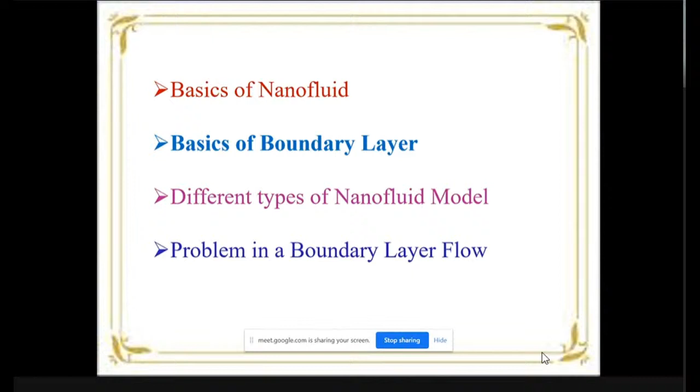So before going to our talk, we want to know how fluid dynamics is used in our life. That is very, very essential. Before starting fluid dynamics, I will recollect some ideas behind that. Mechanics, all of you know, is the oldest physical science that deals with both stationary and moving bodies under the influence of force. In that mechanics, statics is there. It is a science which deals with the body at rest, called statics.

Next, if you come to dynamics, it is a science which deals with bodies in motion. It's called dynamics. Now coming to fluid mechanics: fluid mechanics is a science which deals with the behavior of the fluid at rest or in motion. So that is called fluid mechanics.

So without fluid, we can't live in this world. There's no doubt at all, because in and around, we are surrounded by fluids only. We are breathing air, so that is also a fluid. So in that way, we can say fluid dynamics plays a vital role in your day-to-day life.

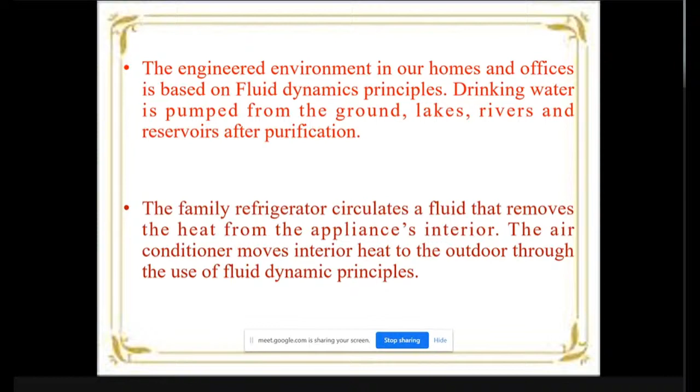Before going to nanofluids, we want to know what is meant by a fluid. Before going to fluids, we want to know the states of matter. Matter is made up of molecules. All of you know that gas, liquids and solids are the three states of matter. Of these three states, gas and liquid we call fluids. Why? Because the definition of a fluid is a substance which is capable of flow.

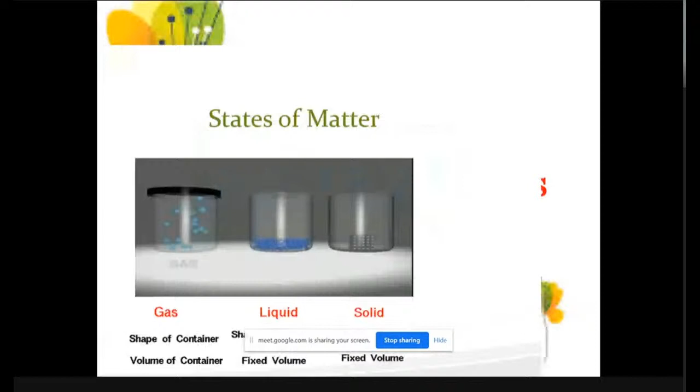Based on their properties, fluids can be classified as compressible or incompressible, Newtonian or non-Newtonian. But nowadays, in the recent scenario, nanofluids play a vital role both in engineering and in our day-to-day life compared to ordinary fluids. So today my topic is going to be mainly on nanofluids.

So what is meant by a nanofluid? I already told you that air and liquids are natural fluids. But a nanofluid is not a natural fluid; it is an artificial fluid. It was first introduced by Choi in 1995 in his laboratory. It is a new class of fluid containing nanoparticles of size 1 to 100 nanometers. That we call a nanofluid.

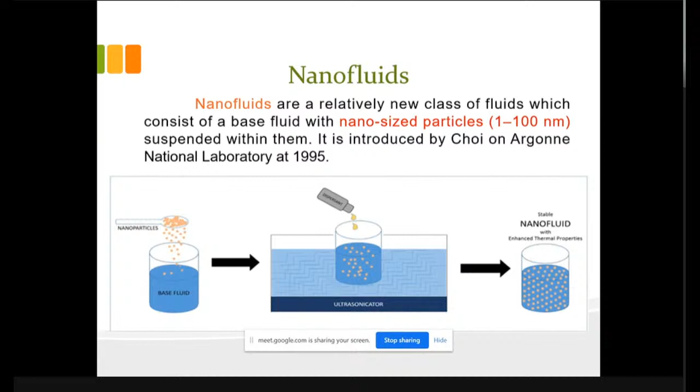To think about a nanofluid, first you take some liquid in your glass. You add some nanoparticles, then it will become a nanofluid. So this is the basics of nanofluids: to the base fluid we add some nanoparticles, and if you mix them, it becomes a nanofluid. It has lots and lots of advantages. We will see them later.

So, the measure of nano in our life. An atom is 0.1 nanometer. These are some examples I am giving. DNA is 2.5 nanometers. Our hair is 1 lakh nanometers, an ant is about 5 million nanometers, a tennis ball is 100 million nanometers. These are some examples of nano measures in our life. So a nanoparticle is a very, very tiny one.

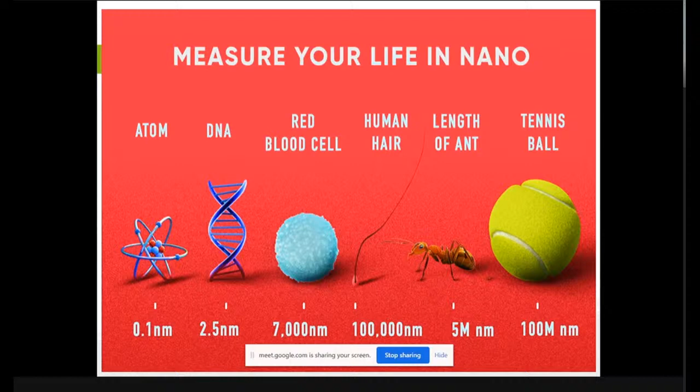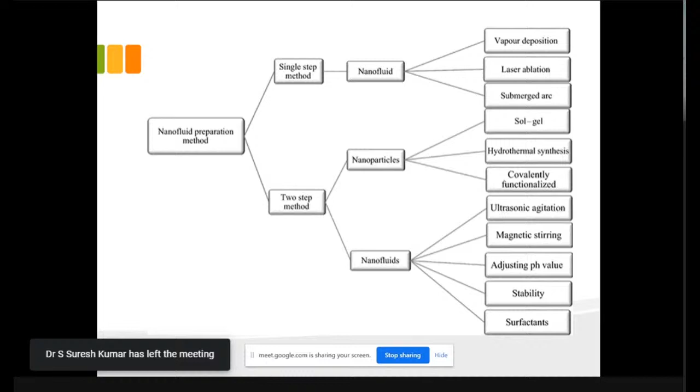If you want to do research in nanofluids, physicists and chemists do the research experimentally, but as mathematicians we are doing it analytically. There are two methods for preparing a nanofluid. The first one is the single-step method, and the second one is the two-step method. In the single-step method, we get the nanofluid within a single step. In the two-step method, first we segregate the nanoparticles, then we take the base fluid, mix them together, and it forms.

Suppose we want to do research in nanofluids experimentally; the experimental part will be very high in cost. For example, if you want to study the uses of gold nanoparticles, nowadays you know the rate of gold is very, very high, so doing experiments is very costly. But if you solve it theoretically using mathematical models, without any cost we will get some basic idea about our research.

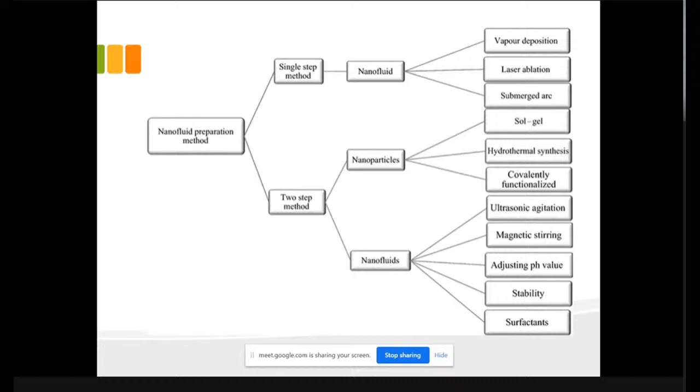Now I am going to tell about the one-step method. What is meant by the one-step method? Producing the nanoparticles and dispersing them in the base fluid in a single step is called the one-step method. You just take the base fluid, put in some molecules, stir well, and you will get the nanofluid. This is the simplest way of making nanofluids.

This is the best for synthesizing metallic nanofluids only. So in the one-step method, it is best for metallic nanofluids.

In the two-step method, in the first step nanoparticles are synthesized separately, and in the second step we dissolve or disperse them into some liquid medium, the base fluid, making a dispersion. So that is called the two-step method.

So this is the experimental approach. Those who want to do experimental work, these are the two methods available. But mainly we will concentrate our research only on the analytical side. There are advantages and disadvantages in both methods when doing experimental work.

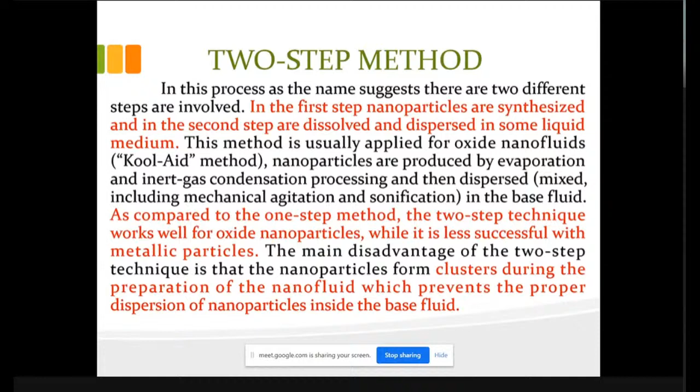So now what is the purpose of preparing the nanofluid? Instead of using the plain fluid, what is the purpose of using the nanofluid? That we want to think about. So already, the nanofluid is nothing but a combination of base fluid plus some nanoparticles.

If only the base fluid is there, suppose you are doing heat transfer, it will take much time. If you want the heat transfer to be high, the thermal conductivity of that liquid needs to be enhanced or increased. Only then will the heat transfer occur faster. So in this aspect, the nanofluid will enhance the thermal conductivity of the fluid. Now I will tell you how.

If you take engine oil, it has a thermal conductivity of 0.15. For example, if you are using engine oil in your car or two-wheeler, it needs to reduce the heat from the piston. The engine oil will absorb that heat, and it wants to reduce that heat, but ordinary engine oil will take much time to do so.

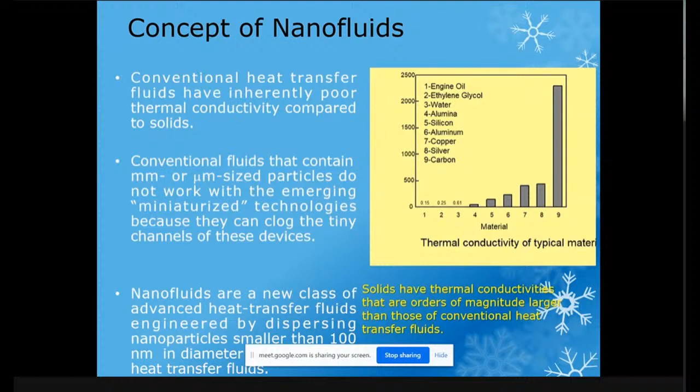So what are the factors that enhance the thermal conductivity of the nanofluid? Already we know that nanofluid is base fluid plus some nanoparticles. So the nanoparticles play a vital role. But we can't add more and more, that's not all there is to it.

So what are the factors that enhance the thermal conductivity of the nanofluid? The first factor is nanoparticle volume fraction, which we will denote as phi. What is nanoparticle volume fraction? It is nothing but the amount of nanoparticles we are adding in the base fluid.

If you add more and more, what will happen? It won't dissolve, and there will be sedimentation falling to the bottom layer. For example, if you are preparing tea or coffee and you add sugar and stir well, it will dissolve. But if you add more and more sugar, after a few attempts, it won't dissolve anymore.

That sugar volume acts as a barrier for heat transfer flow. That's why the volume fraction phi is very important for preparing nanoparticles. It will enhance heat transfer if it is minimized. The second thing is nanoparticle material.

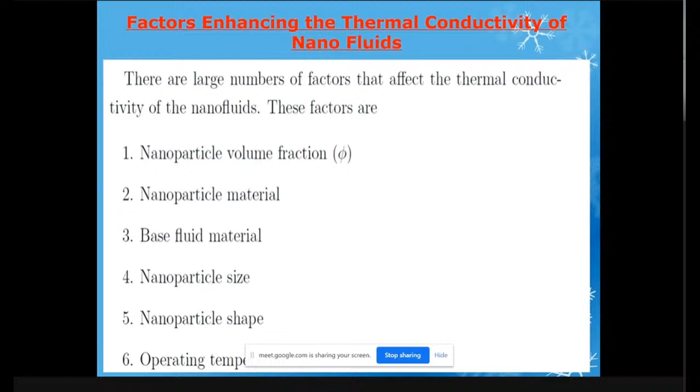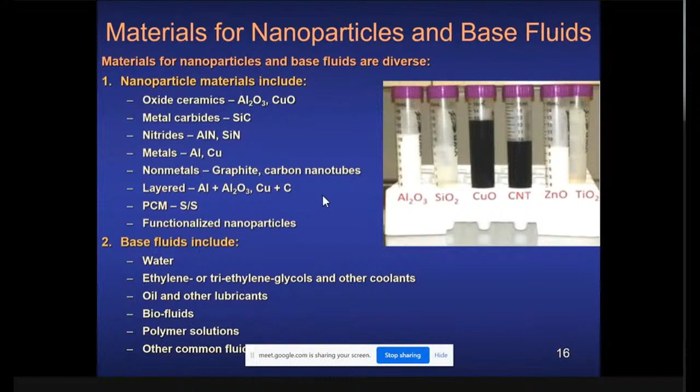Now I am going to show some examples of nanoparticles. Oxides are there, metals are there. Oxides means Al2O3, CuO, and so on. Then metals, and PCMs are there. Coming to base fluid, we have water, ethylene glycol, oil or other lubricants, biofluids. These are some examples of base fluids and nanoparticles.

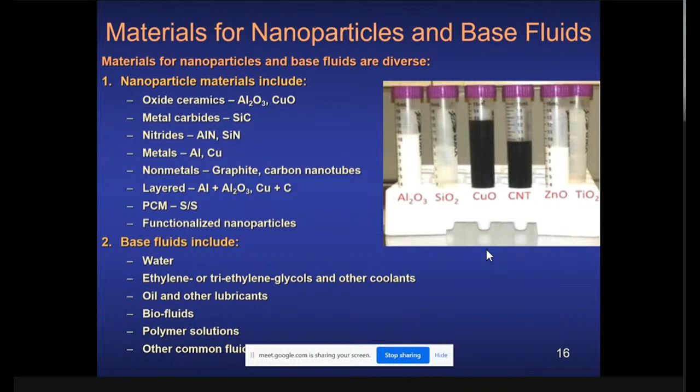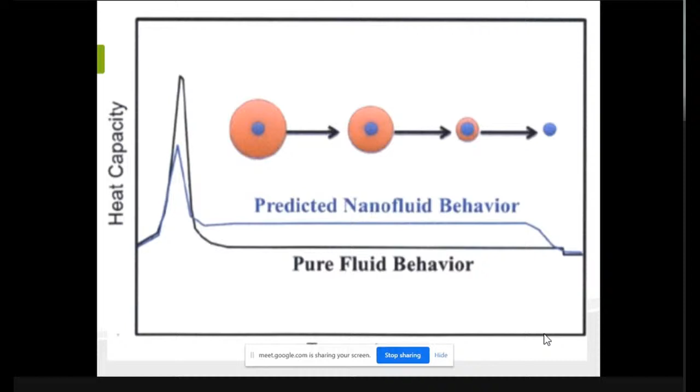Now I'm going to tell some applications of nanofluids. In transportation problems, we use these applications for industrial cooling. Cooling purpose is very important - cooling applications include nuclear system cooling. Space and defense also use nanoparticles, cooling of microchips, and medical applications. These are some applications of nanofluids in our life.

You can see here - all of you know that heat transfer in solids is by conduction. Heat transfer in liquids involves both conduction and convection, though mostly convection. So nanofluid is nothing but liquid plus solid - conduction plus convection gives an advanced heat transfer rate. So nanofluid means it will give an advanced heat transfer rate.

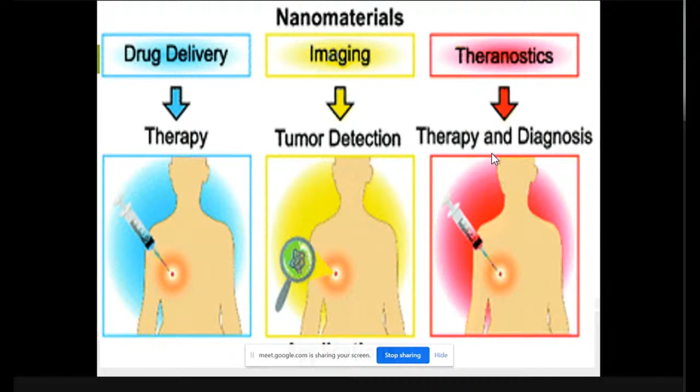So now I told that nanofluid plays a vital role in medical applications nowadays. This is drug delivery. Nanomaterials are used in drug delivery therapy also. So how, I am going to explain here.

For example, if you have some cancer in your hand, in those days what would they do? Some cancer in your lungs or anything, you would want to do an operation, open heart surgery, or just operate and take that cancer cell outside. The cancer cell is nothing but unwanted cells formed in our body.

If you use the nanoparticle, how the medicines are used is: for example, if in our hand that cancer cell is there, in that particular area, we can inject those nanoparticles. It will go and deposit on the cancer cell. If you give some external force or external magnetic force, it will dissolve, and automatically the cancer cell will be destroyed. Just let me explain this with a video.

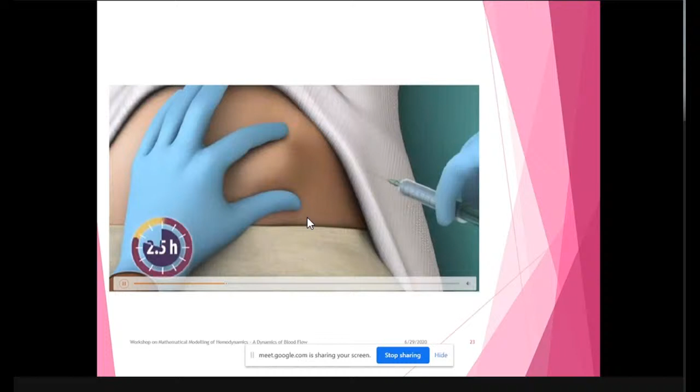So you can see here our human body. The black areas are some cancer cells. This is our nanoparticle. So just you can inject it, and when you give that nanoparticle, it will go and coat on those cancer cells. Here in the stomach, the cancer is there. Just we are injecting the nanoparticles. So what will happen is the particles go inside our body and deposit on the cancer cell itself. So this is how it is depositing there.

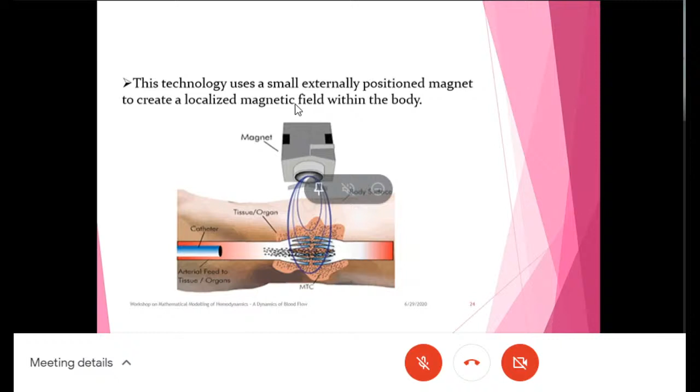So if you give some external force, automatically the cancer cell will be destroyed. You can see this here: in my hand, the cancer cell is there. I'm giving magnetic nanoparticles in that area. If you apply an external magnetic field on our hand, or wherever on the body surface, and then if you remove that magnetic force suddenly, the magnetic particles which are in the cancer cell will dissolve our cancer cell. So nowadays, without any operation, we can take treatment for cancer cells using our nanoparticles. This is one of the applications of nanoparticles in medicine.

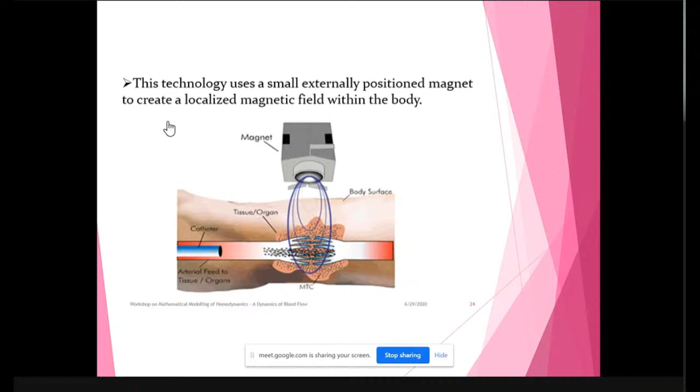So I already told that we are going to deal only with theoretical aspects. We are not going for experimental research. When we want to study theoretically, we need to know the physical properties of the nanofluid.

The first one is the thermal conductivity of the nanofluid. It depends on the particle volume fraction and the thermal conductivity of the base fluid and the solid nanoparticles. So we are having two types of models on the thermal conductivity. The first one is the Maxwell model of thermal conductivity, given in the equation Knf equal to. It was first proposed in 1873. So this is one type of thermal conductivity of

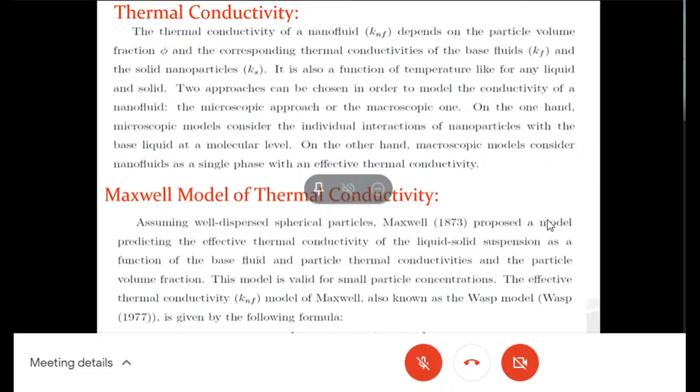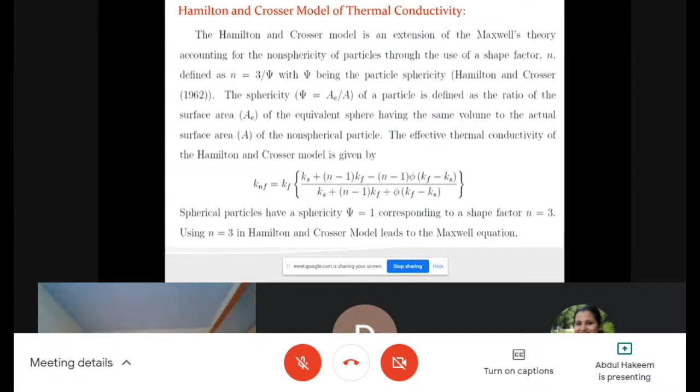nanofluids. The second one is the Hamilton-Crosser model of thermal conductivity. This is given in this equation. In this model, they define n, the shape factor n. n is nothing but 3 by psi. Psi is nothing but the ratio of the surface area of the equivalent sphere having the same volume to the actual surface area of the nanoparticle.

Hello? So you can continue, sir. Yes, okay, sir. Yes, sir. Please continue. Okay.

If water will flow a long distance when comparing with the oil, it is because of the viscosity. So like that, in the dynamic viscosity we are having two models. The first model was done by Einstein. If the volume fraction is less than 1, we can use that Einstein model. Next one is the Brinkman model. It was introduced in 1952. Normally, in our research, we are using the Brinkman model only for viscosity.

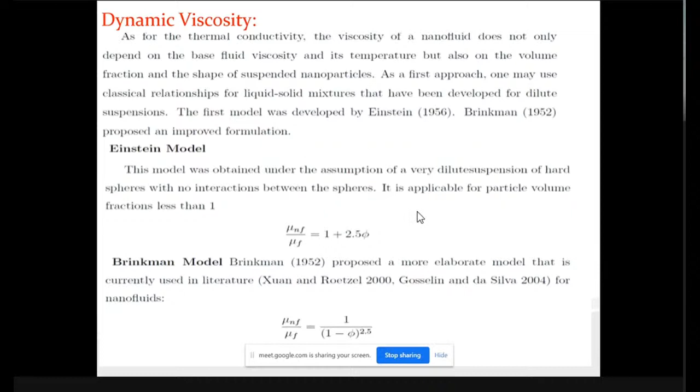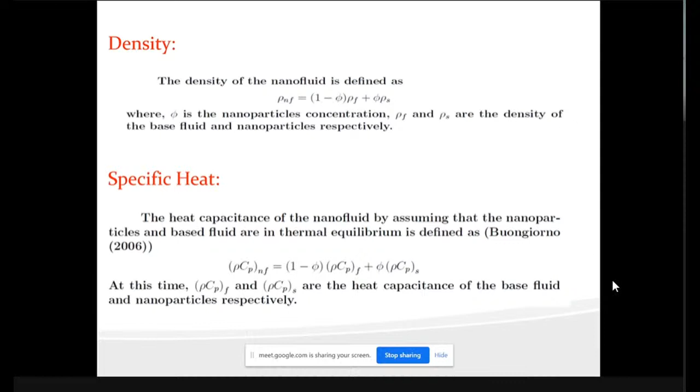If we take the specific heat capacity, Buongiorno in 2006 introduced that rho Cp of nf is equal to (1 minus phi) rho Cp of fluid plus phi rho Cp of solid. So these are the specific heat capacity. So if you want to do research, you want to know some physical properties. The main ones are thermal conductivity, viscosity, density, and specific heat capacity of the nanofluids.

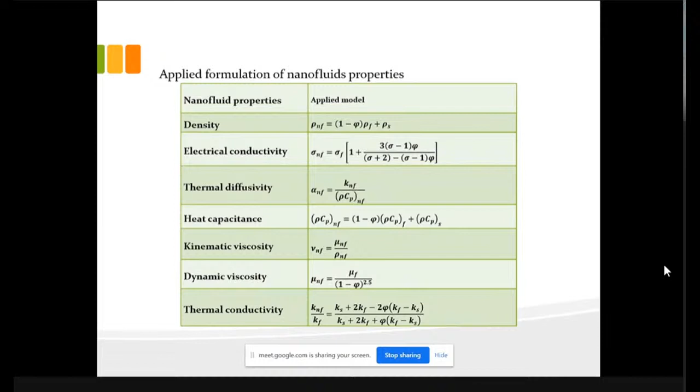So this table shows some applied formulations of nanofluid properties. Density is given, electric conductivity, thermal diffusivity, heat capacity, kinematic viscosity, dynamic viscosity. So these are some examples of properties of nanofluids.

So now we have a doubt. Sir, we said that a nanofluid is nothing but a base fluid where we are adding one type of nanoparticle. So is it possible to add two or more nanoparticles? Yes, it is possible. In the current scenario, research is going on in that area. We call it a hybrid nanofluid. A hybrid nanofluid is nothing but adding more than one type of nanoparticle in the base fluid.

For example, in our day-to-day life, if you had something spicy, for example biryani, what will we do? If you want to digest quickly, we will take lemon juice with sugar. Somebody will like salt, so in that lemon juice we will add some salt. If you want to digest very quickly, you want to have lemon juice with salt and sugar.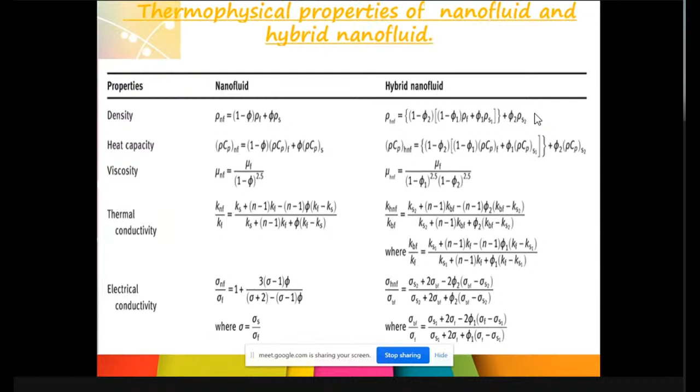Likewise, we can define the heat capacity, viscosity, thermal conductivity, and electrical conductivity of the hybrid nanofluids also. So those who want to do research in nanofluids, first you need to know these properties, which property we are going to use. In this slide, you can see that the viscosity is nothing but the Brinkman model. Many models are also there. That depends on our problem. So I gave some basic idea about nanofluids. Now we will come to the boundary layer.

So what is meant by boundary layer? If you ask me, I will give the definition. The boundary layer is nothing but the locus of points at which the velocity of the fluid particle is 99% of its free stream velocity. This is the definition of boundary layer. The boundary layer concept was first introduced by Prandtl in 1904 at the International Congress of Mathematicians held in Germany. He did that experimentally, and he gave some layers also: laminar boundary layer, transition region, and turbulent boundary layer, using the values of the Reynolds number.

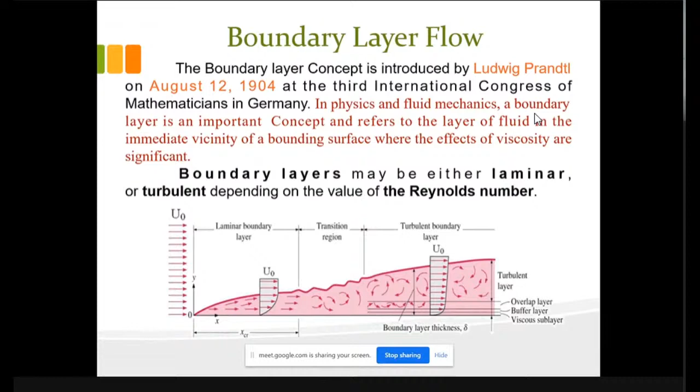If the Reynolds number is above 5 into 10 to the 5, we say that is the turbulent boundary layer. Below that is a laminar boundary layer. That is called the critical Reynolds number. So now I'm going to explain what is meant by boundary layer flow. For example, you have a flat plate. The solid is stationary. The fluid is moving parallel to the solid, above the solid. The surface where the fluid and the solid are touching together, in that region, is the boundary of the fluid. I will explain later.

In that boundary layer problem, the first case: the solid is stationary, the fluid is moving. That was done by Prandtl experimentally. Another case is also there, for example, the solid is moving and the fluid is stationary. An example of that second case is the moving of automobiles. If you take our two-wheeler or car, in the car a gearbox will be there, and in that gearbox we have some oil. If you change the gear, the parts will move here and there, up and down, but the fluid is at rest.

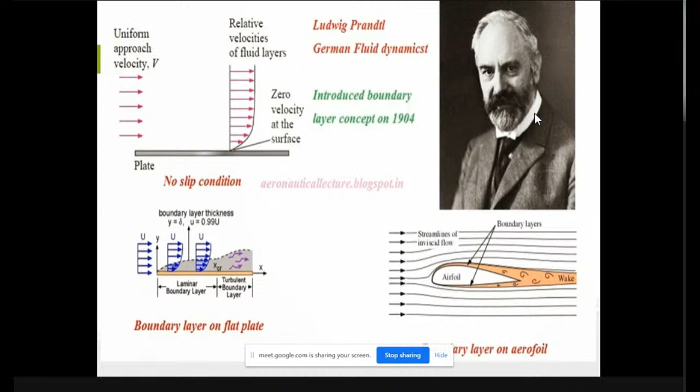So like that, so many things are there in boundary layer. In our research, we are going to deal with only the first part. We are keeping the solid stationary, and the fluid is moving. This is the experiment done by Prandtl, the German fluid dynamicist, in 1904. So I'm going to explain.

I already told that the definition of the boundary layer is nothing but the locus of the points at which the velocity of the fluid particle is 99% of the free stream velocity. Otherwise, we can say the boundary layer is a region in a flow field inside which the fluid flows with a high relative velocity. In that region, the fluid is moving with a high relative velocity. So that is also another definition of boundary layer.

If you ask in general, boundary layer theory, what is meant by boundary layer? I told the engineering part of it. If you think about it generally, I'm going to tell one example. In general, large crowds are there, for example, any temple festival or some Ratha Yatra. Think about some Ratha Yatra. You can go to the upper layer of that crowd, that is, you can stand on any building and just watch that Ratha Yatra.

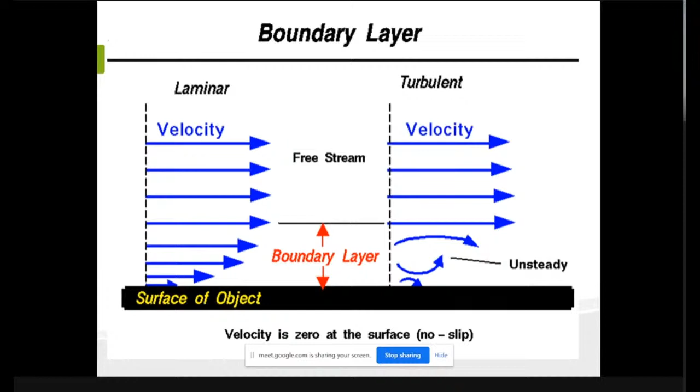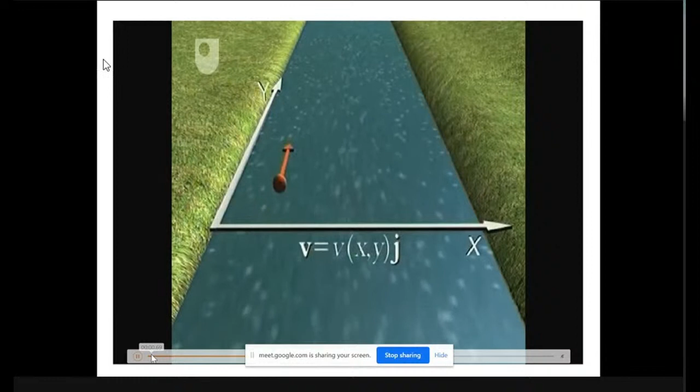So now I'm going to explain here. I'm going to explain the boundary layer by a river. Normally, the banks of a river are not in a straight path. They may be wavy. In a river, some obstacles will be there, some rocks will be there, some solid surfaces in the center. So I am omitting all those things. What I am considering here is that the bank of the river is always a straight line. We have two banks of the river, and we take X and Y axes. X is nothing but the width of that river.

If you closely look at the stream in that river, we can observe three types of flow. On the left wall side, the flow is different. In the middle, the center stream, the flow is different. And the right side is also different. Now you can see the real river flow. In that real flow, the stream is moving in the center of the river only. If you see both banks of the river, it will be very slow. Sometimes there will be a stationary point.

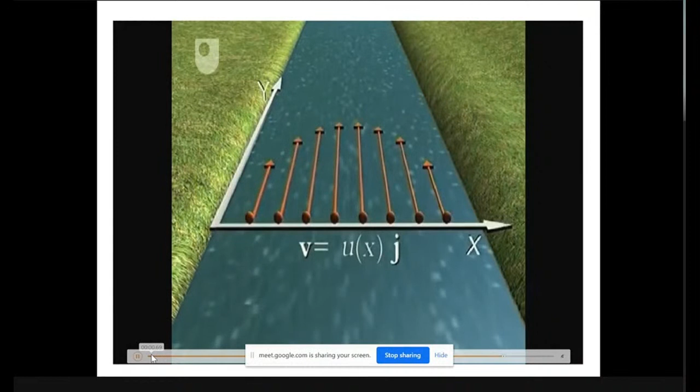So now come to our model. The velocity of the flow will be high at the center of the stream only. On both sides, the left side and the right side, the velocity will be very low. There will also be some rotational velocity at the banks of the river. So boundary layer is nothing but the study of the flow near the wall, on both sides. So that is called boundary layer. Now I am going to explain the definition of the boundary layer here.

So I already told you 3 types of flow will be there. On the 2 boundary sides, one flow is there, and the middle stream is high. So how does this happen? Because of the force. We will call that the cohesive force and the adhesive force. So what is meant by cohesive force? I am going to explain.

The cohesive force is nothing but the interaction force between the same molecules. In the center of the stream, we have only water molecules. The force between the same particles we call the cohesive force. If you think about the boundary, there we have a solid surface and a liquid fluid surface. So the surfaces are different. The force between 2 different surfaces we call the adhesive force.

At the boundary, if the adhesive force is 0, there is no trouble for us. Now we can think of it this way. There is a war between China and India. If the relation between them is the same or 0, there is no problem. But if there is some disturbance, there will be a fight between the 2 countries because of the boundary, because they are 2 different countries. In that way, when 2 different surfaces are there, that force is called adhesive force. That is mainly seen in our boundary layer flow.

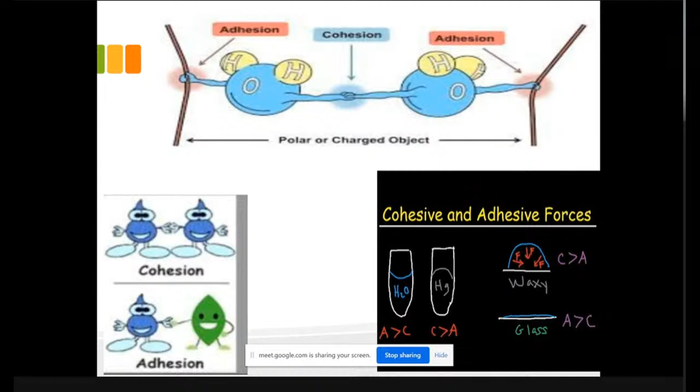So now I am coming to the definition of boundary layer. We are studying the first case, in which the solid is stationary. We are keeping the solid stationary, and only the liquid is moving. Now you can see here. Now I am going to explain the boundary layer concept.

First I am considering the free stream. We are taking the y-axis. The free stream velocity is u infinity. The flow is perpendicular to the y-axis. In that flow, I am just adding one solid surface. So in the free stream, I am adding the solid surface.

You can see in the video, the red color, the very first layer between the solid surface and the liquid. That layer sticks to the solid surface, so u is equal to 0. We call that the no slip boundary condition. On the very first layer between the solid surface and the liquid, the velocity is 0. That condition is called the no slip boundary condition.

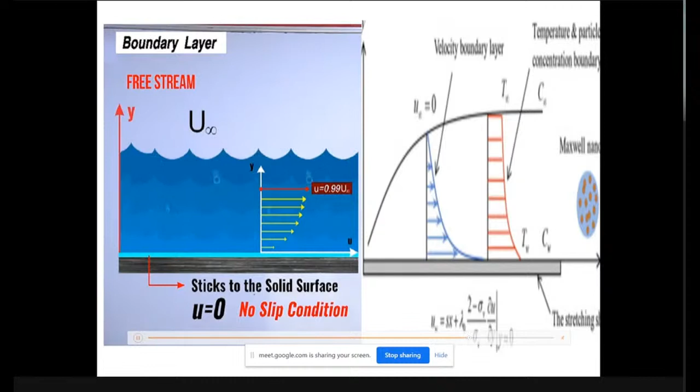If you see where the red arrow is, at that particular point 99% of the free stream velocity will occur. I am considering one single point. Now consider the whole region. In that whole region, if you take a number of points, we will get a zone of 99% of the free stream velocity.

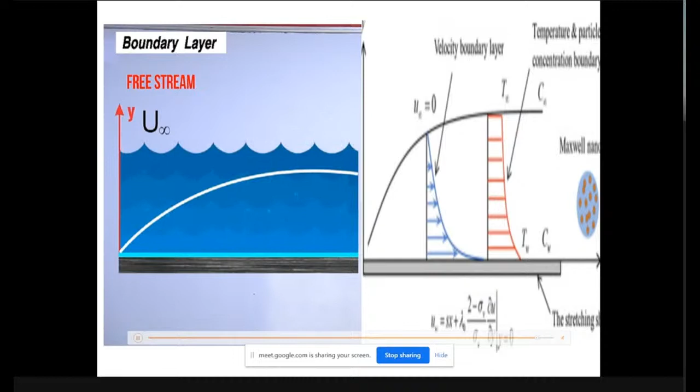Just draw the locus of those points. It will form one layer, and that is called the boundary layer. Now come to the definition I told you: the boundary layer is nothing but the locus of the points at which the velocity of the fluid particle is 99% of the free stream velocity. So this is the definition of the boundary layer.

A free stream is there, and I am introducing a solid surface. The fluid is flowing on the solid surface. At the very first layer of fluid, u is equal to 0. That is the no slip boundary condition. We take one point. If you study the velocity in the upward y direction, the velocity is always increasing. In one particular zone you will get 99% of the free stream velocity for a single point.

Now take the whole region and follow the same procedure. You will get many points of the 99% free stream zone. So you can draw the line. If you draw the locus of those points, you will get the boundary layer. So that is the definition of the boundary layer: a layer inside which relative motion between the fluid particles may exist.

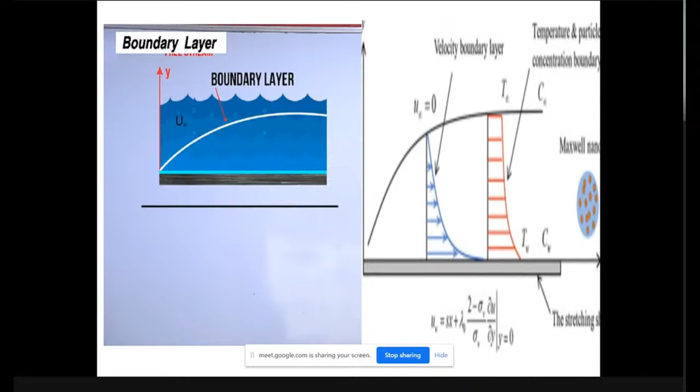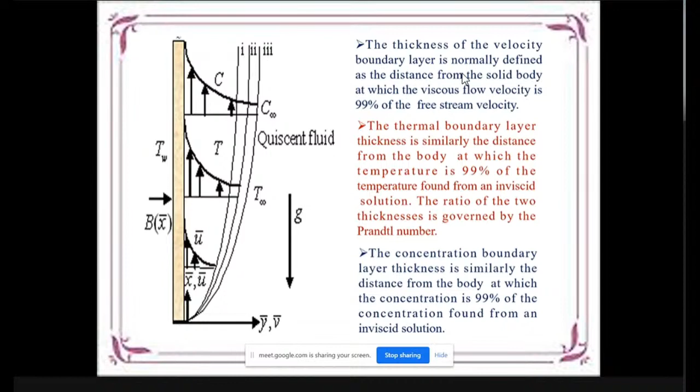We have three types of boundary layer: velocity boundary layer, thermal boundary layer, and concentration boundary layer. The time is running out, so I'm going to rush the definitions. The point where the velocity is 99% of the free stream velocity gives the velocity boundary layer. Similarly, where 99% of the temperature is found is called the thermal boundary layer. If you add concentration, where 99% of the concentration is found is called the concentration boundary layer.

The Prandtl number, Pr, all of you know. The Prandtl number is nothing but viscous diffusion by thermal diffusion, that is nu by alpha. We define Pr less than 1, Pr equal to 1, and Pr greater than 1. If Pr is greater than 1, the thermal boundary layer is thinner than the velocity boundary layer. If the Prandtl number is less than 1, the thermal boundary layer is thicker than the velocity boundary layer. So these are the 3 boundary layers.

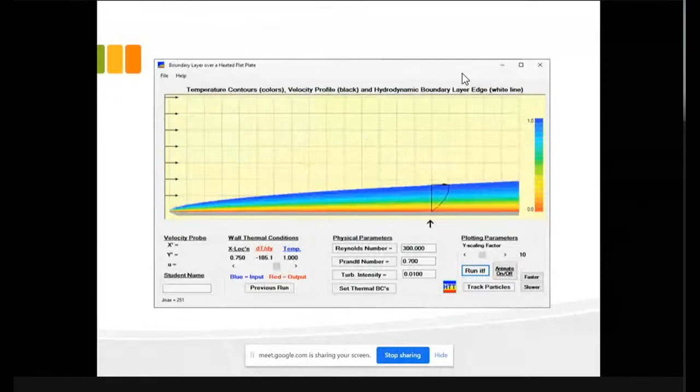Now I am going to show one animation of a boundary layer over a heated flat plate. This is CFD, computational fluid dynamics, as an example, using Fluent software. In that software, if you increase the Reynolds number, you can observe the boundary layer increasing or decreasing. We are fixing the Prandtl number. I showed only examples here.

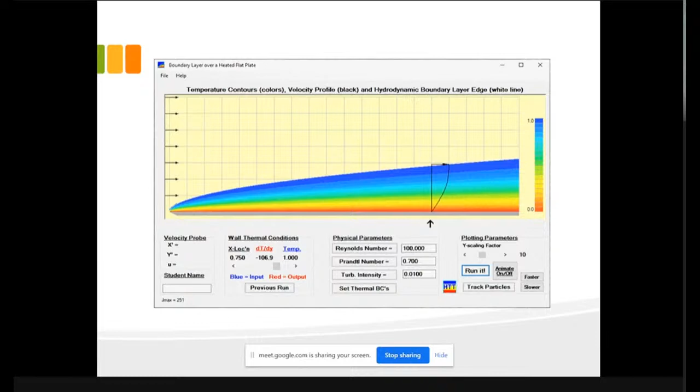If you want to do research in nanofluids, you can do it experimentally, mathematically, or computationally. Experimentally it is high cost, so we can't do that research. As mathematicians, we want to do it mathematically, choosing either the analytical method or the computational method. With the analytical method we get an exact solution using some limiting conditions, because our governing equations are non-linear.

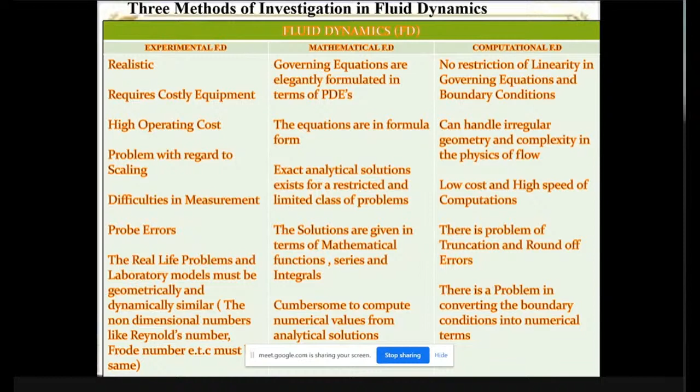Our governing equations are non-linear. So now we will move to an application part here, a direct application of boundary layer theory.

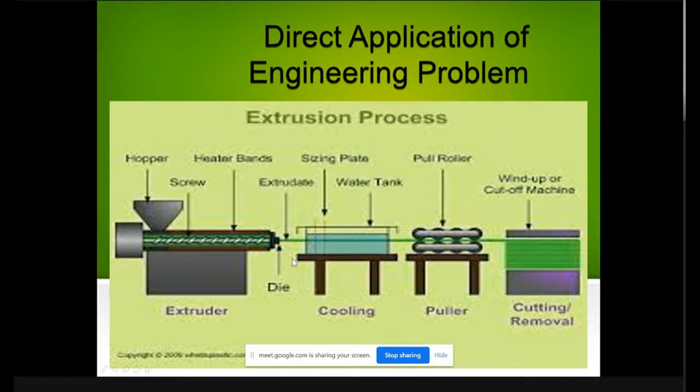Here is the extrusion process of plastic. You can see that there are 4 layers: one is called the extrusion layer, then cooling layer, puller, and cutter. Our research is only concerned with the cooling layer, that is the water tank. Let me show you here. Continuous extrusion uses a die.

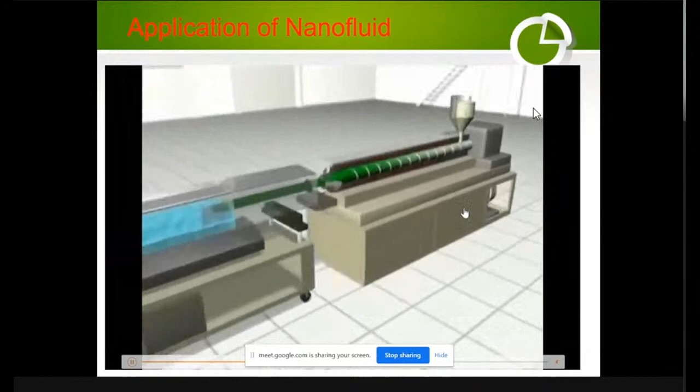In the extrusion process, in the hopper we are putting some plastics, which is heated at high temperature. In the die region, it gets some shape, and we want to cool it quickly. For that,

the shaped particle is stretched through the water bath. The blue color represents the water bath. If this water bath uses ordinary fluid, the length of the water bath needed will be very high. If you use nanoparticles, the size of the water bath will be reduced, so the experimental cost will be reduced. This is one of the applications of nanofluids.

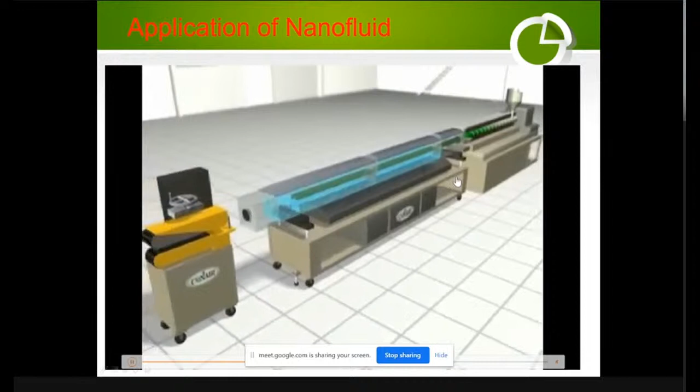Now I am coming to the first model, the Buongiorno model. In this model, we are going to study only the thermophoresis and Brownian motion effects of the boundary layer flow of a nanofluid over a vertical plate. In this model, we did not consider the particle shapes; we concentrate only on the thermophoresis effect and the Brownian motion effect. This is a study of incompressible laminar flow.

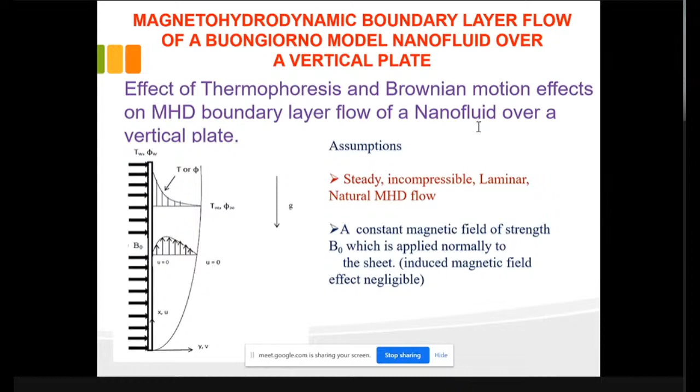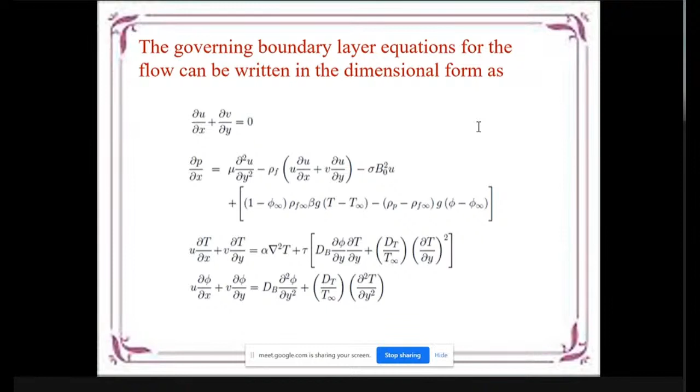B naught is observed here. The governing equations are given here: first the continuity equation, second the momentum equation, third the energy equation, and fourth the concentration equation, which shows how much amount of nanoparticles are added. The corresponding velocities u and v are given here.

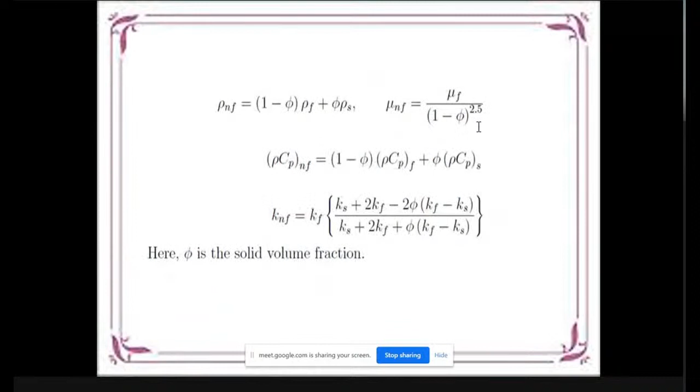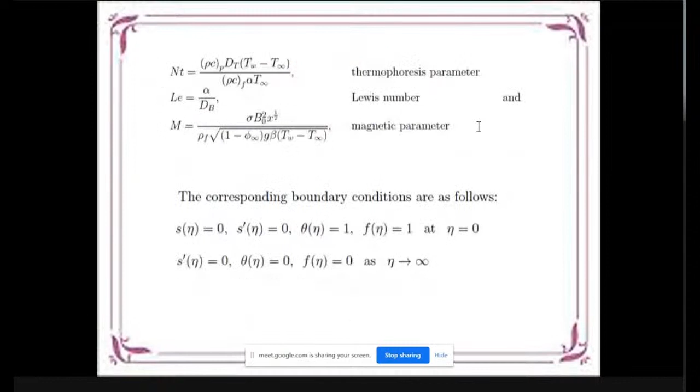We already know the properties of nanoparticles; phi is the solid volume fraction. The boundary conditions are given here. We solve this problem either analytically, using the governing equations, which are 3 types of equations: nonlinear partial differential equations with suitable boundary conditions.

If you want to solve it, either analytically, after non-dimensionalizing and using some similarity transformation, the governing equations are converted into nonlinear ordinary differential equations with transformed boundary conditions. You can then solve it analytically or numerically, depending on the approach.

In the first problem, we solved it using the homotopy analysis method. I'm not going into more detail about the analytical solution part of the boundary layer, because tomorrow my colleague is going to handle that section, particularly the spectral collocation method. So I'm going to just tell you the results here.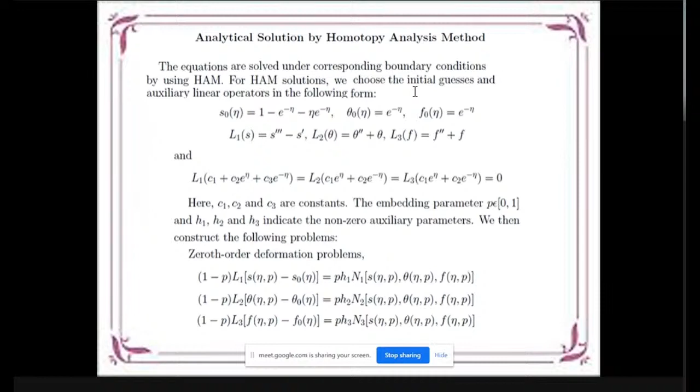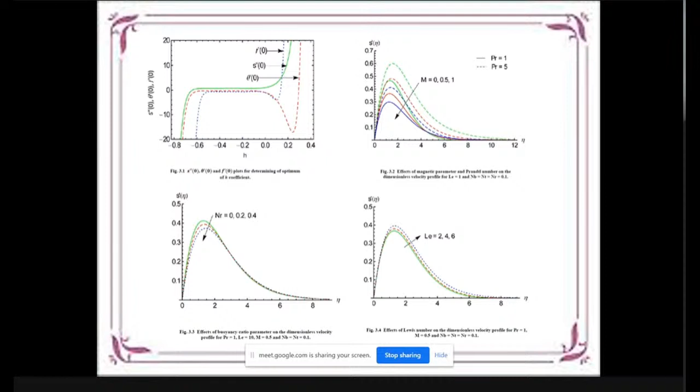In this, you can see the effect of the magnetic parameter and the Prandtl number on the dimensionless velocity profile given here. If the magnetic force increases, the velocity decreases. If the Prandtl number increases, the velocity automatically increases.

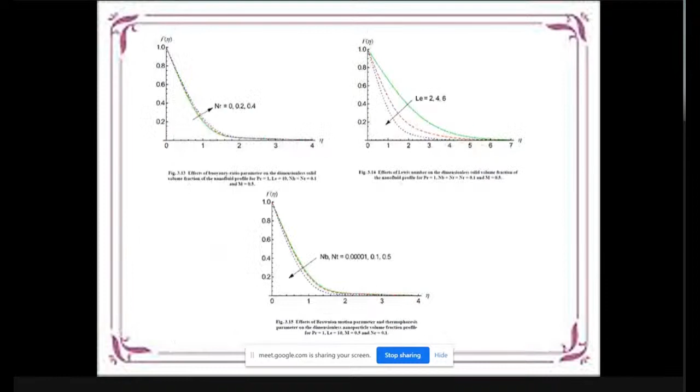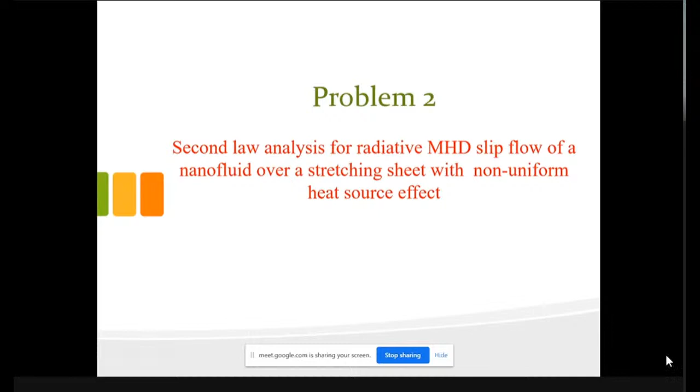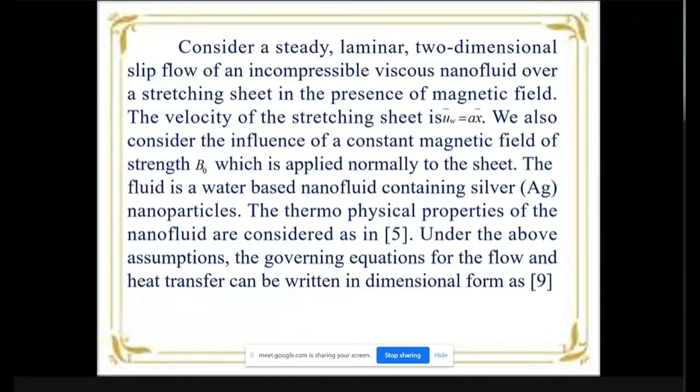In the second problem, it's a similar setup, but here we are particularly dealing with nanoparticles. We are considering a steady laminar two-dimensional slip flow over a stretching sheet, applying water as the base fluid and silver as the nanoparticle. The governing equations are given.

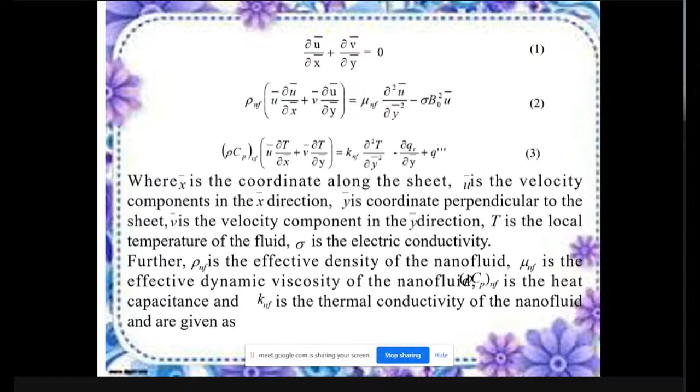The second equation is the momentum equation, where the last term represents the external magnetic force applied. The third is the energy equation, where the second term on the right-hand side defines the thermal radiation effect studied here, and also the non-uniform heat source sink is studied here. Using these results, these are some physical properties of the nanofluid.

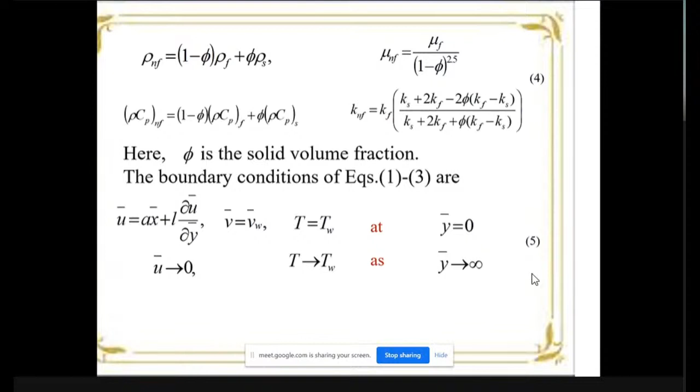We used here Brinkman viscosity, and KNF, that is thermal conductivity, is used here. The Maxwell model is used in our study.

Introducing the non-dimensional variables, the governing equations are converted into equations 7 and 8 using the stream functions. The role of the stream function is to reduce the unknowns, so the flow pattern is studied analytically using the stream function.

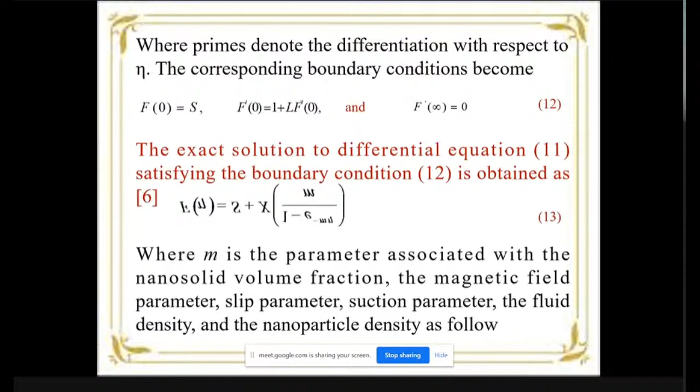We are using some new variables, just using the stream function, and we will get some results. So what does the result mean?

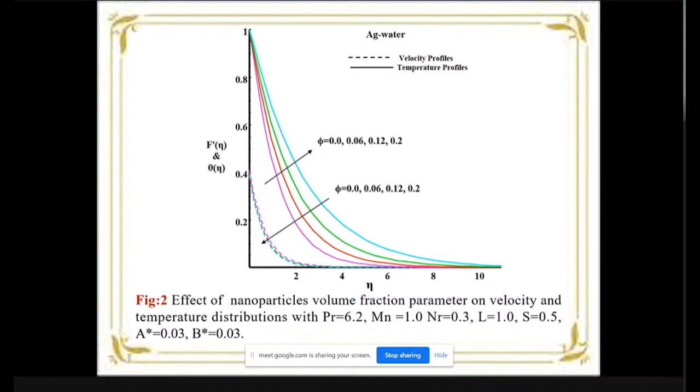Why does this happen? If you increase more and more nanoparticles in our base fluid, automatically there will be Brownian motion in those particles, which reduces the velocity of the flow. If the concentration is increased, the heat transfer will be very high. That is the reason behind this figure.

So now you can see these are some results. In this study, what have we concluded? This is one of our studies only. The velocity distribution is very high, the temperature of nanofluid and velocity distribution for different cases.

The velocity is very high for the oxide when compared to the metal nanoparticle. Ag and copper are the metal nanoparticles, while TiO2 and Al2O3 are the oxide nanoparticles. So in this result, we conclude that if you want to reduce the velocity, you use the metallic nanoparticle; if you want the flow velocity to be high, you use the oxide nanoparticle.

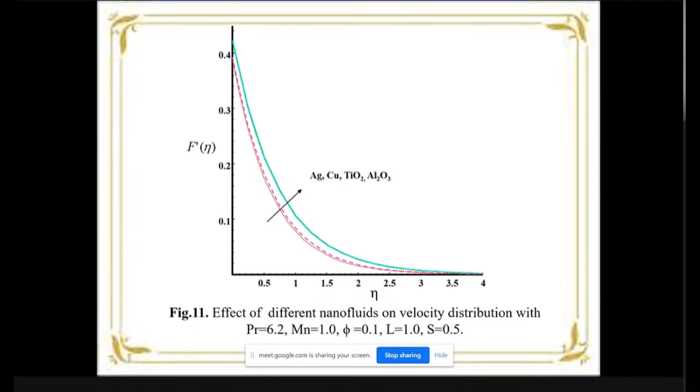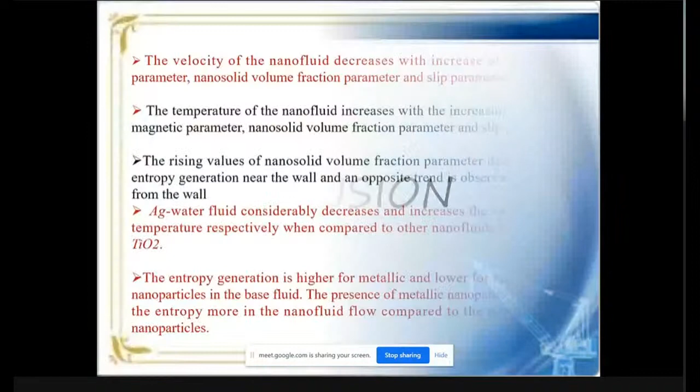But a reverse trend is observed in the heat transfer rate, and also in the second law. I'm going this way... I think the time is 11:20, so I will stop here.

So like this, we can do research in nanofluids. I already told those who want to start research in nanofluids that nanofluid is nothing but base fluid plus nanoparticles. For the base fluid, you can take either Newtonian or non-Newtonian fluid. For the nanoparticle, you can take magnetic or non-magnetic, or metallic or non-metallic nanoparticles.

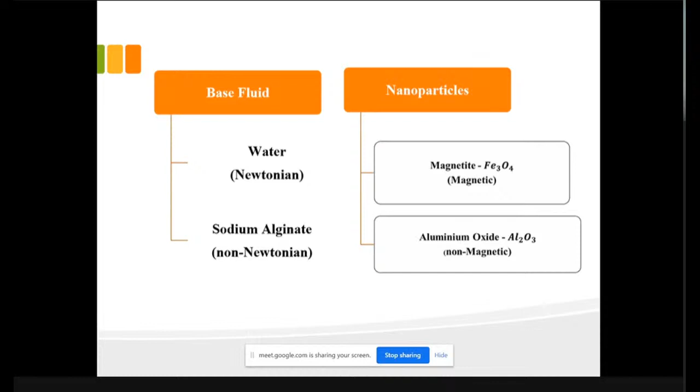We published 5 to 6 papers in this field. Likewise, you can also do research in hybrid nanofluids. One of my students is doing research in hybrid nanofluids also.

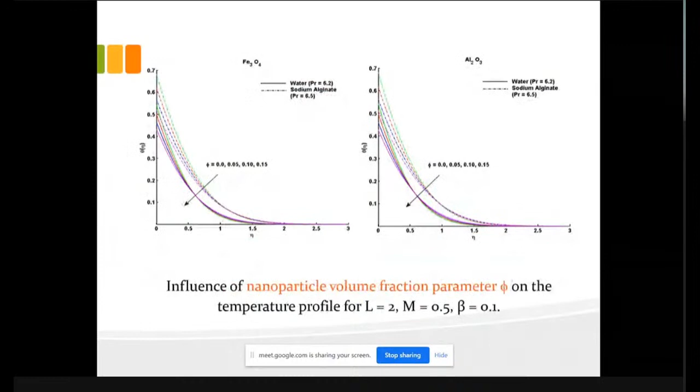Nowadays, all of you are in this lockdown period, so be safe in your house, and to increase your immunity power, just have a cup of milk with some pepper powder. Just use pepper powder, you can drink it daily, and definitely it will give some immunity power. That milk is nothing but our nanofluid, with the pepper as the nanoparticles. Thank you for your attention.